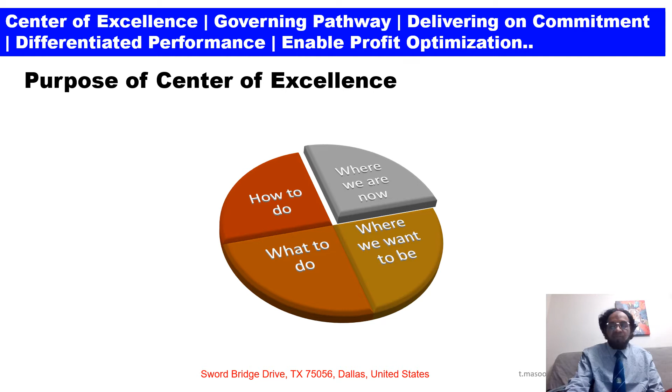Center of Excellence, lecture number 5, HAZOP study guidelines, section number 4. Purpose of Center of Excellence: where we are now, where we want to be, what to do, and how to do it. These are our four concepts in order to deliver the Center of Excellence.

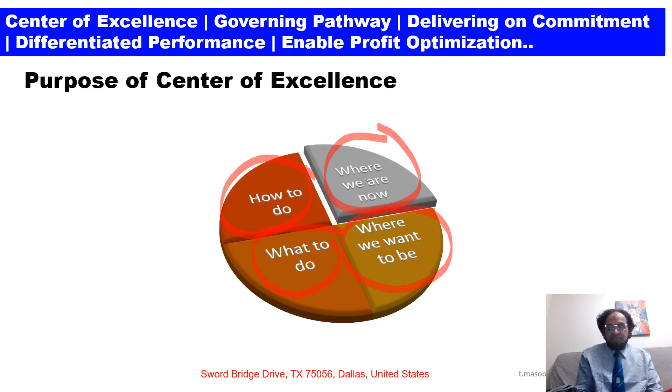These are a narrative, sequential, to deliver as far as the Center of Excellence is concerned. Center of Excellence: governing pathway, delivering on commitment, differentiated performance, enabling profit optimization. This is a Center of Excellence framework. We have already discussed HAZOP, a brief summary about QRA, quantitative risk assessments, risk assessment management system, and SIL assessment.

Today we will give a brief about 5 segments, then we will discuss in detail at a later stage. First, we will give a brief about the leadership best practices. Engineering production best practices are leadership methods and simple in concept.

We will discuss in my lectures on leadership best practices, matrix organizations, about balanced leadership, layered leadership differentiates focus but keeps line of sight. Production asset business widens view to see the whole picture, business planning tool and budget process. We will discuss these in leadership best practices or engineering production leadership.

Lecture number 2 on Center of Excellence, at a later stage, segment number 2: competency assurance. In competency assurance we will discuss what competency is, key elements of staff competency enhancement, how to maintain personal and operational integrity, and we will also discuss ensuring a personal competency development and sustainment plan.

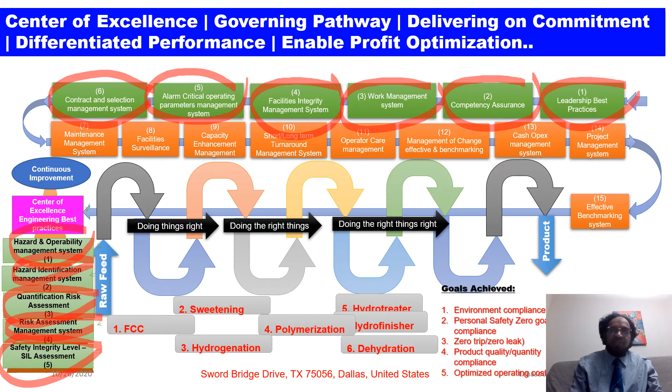Center of Excellence for continuous improvement. We will start from bottom to top here. First segment: personal safety, contractor, co-workers, and community safety must be reliable.

Okay, these are my leading factors. My semi-leading environment compliance, process and asset safety: work safely or not at all. Number 3, my semi-lagging factors: there's always a time to do right things in the right way. And lastly, improvement: if it is worth doing, do it in a better way.

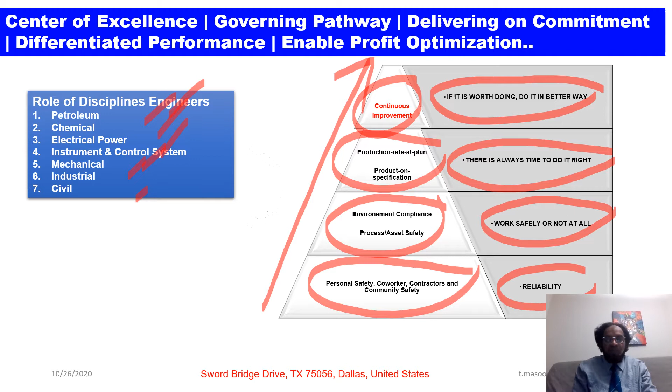So in order to deliver, we need different discipline engineers: petroleum, chemical, electrical, instrument, mechanical, industrial, civil engineer. What is their specialty? Loss prevention engineers, safety engineers, process and operation engineers, optimization, all discipline maintenance engineers, corrosion engineers, integrity engineers, reliability, cost, budgeting, and project engineers. They have to deliver in order to prevent the leakage from leading factors.

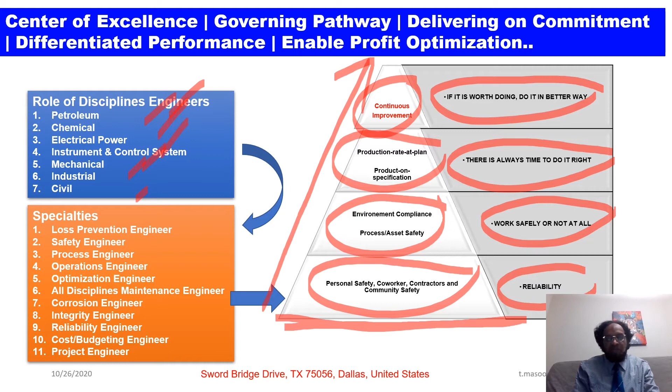So if we plug the leading factors, you are on the right way to deliver or improve this system or system performance as planned or as desired. In order to deliver the result, a center of excellence for engineering best practices is important, vital, and viable.

Key takeaway points: HAZOP study lecture number 4. First, we will discuss the HAZOP process: preparations, briefing and data collection, and phasing the HAZOP study activities.

Forward message, this document has been developed for corporate HSE and quality management system to determine and provide a minimum requirement for the Hazard and Operability study, that is HAZOP. This document is published for oil and gas companies, operation departments, contractors, and consulting utilizations.

The document in its present form reflects, as far as possible, current corporate requirements, taking into account the known available industry best practices and applicable latest national and international codes and standards. This document is subject to periodical review to reaffirm its adequacy or to conform to any changes in the corporate requirements or to include new developments in the subject matter.

This document recognizes that there will be cases where addenda, data sheets, or other clarifications need to be attached to the HSE publication to suit specific application or service environment. As such, the content of the document shall not be changed or re-edited by any user, company, or its contractors, suppliers, etc. Any addenda or clarification entailing major changes shall be brought to the attention of the custodian department, or comments and recommendations about this document forwarded to me at t.masood.dr@bath.edu.

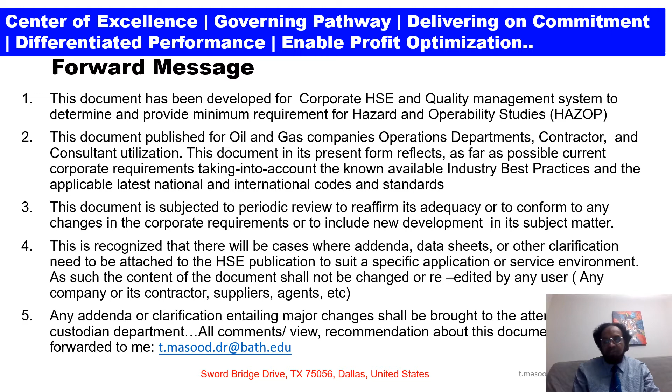Why is HAZOP study needed? First, HAZOP is required for any changes to the process. Hazard and operability studies are a form of hazard identification. The study identifies possible deviations. The contractor shall conduct HAZOP study in compliance with the requirements in the selected company operational guidelines.

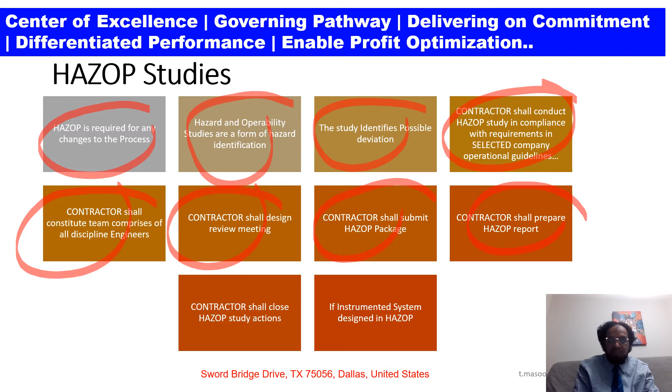The contractor shall constitute a team comprising all discipline engineers. The contractor shall design a review meeting. The contractor shall submit the HAZOP package. The contractor shall prepare the HAZOP report. The contractor shall close HAZOP study action points; if instrumented system designed in HAZOP, it can also be discussed.

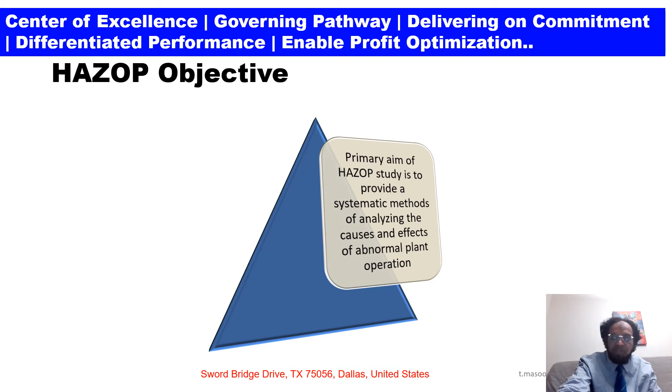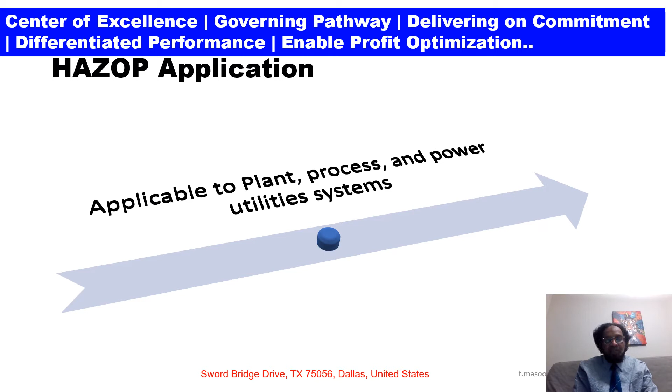So the HAZOP objective: the primary aim of the HAZOP study is to provide a systematic method of analyzing the causes and effects of abnormal operation. Scope: to specify the structure, responsibility, and techniques of the hazard and operability study. HAZOP study is applicable to plant, process, and power utility systems.

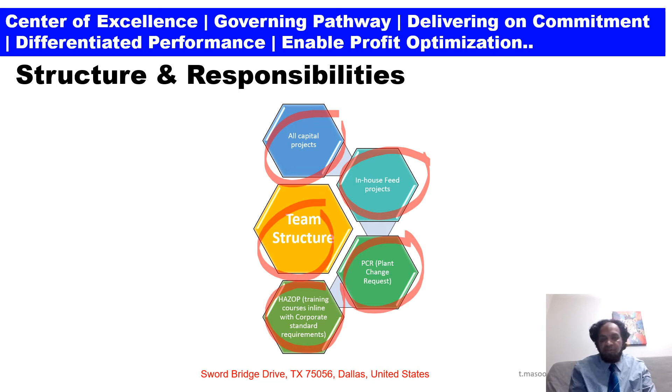Structure and responsibility: team structure first. So for all capital projects, in-house or Feed projects, PCR (a plant change request), HAZOP is a training course in line with corporate standard requirements.

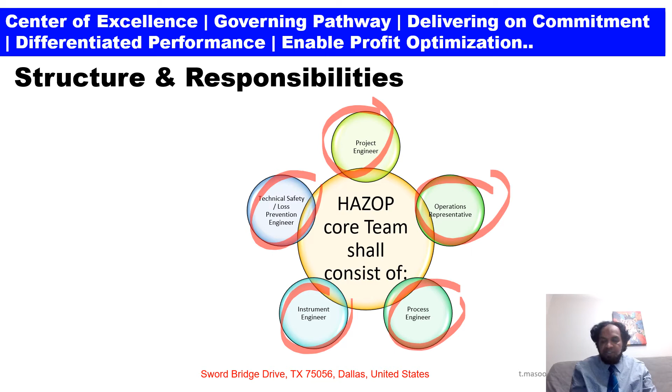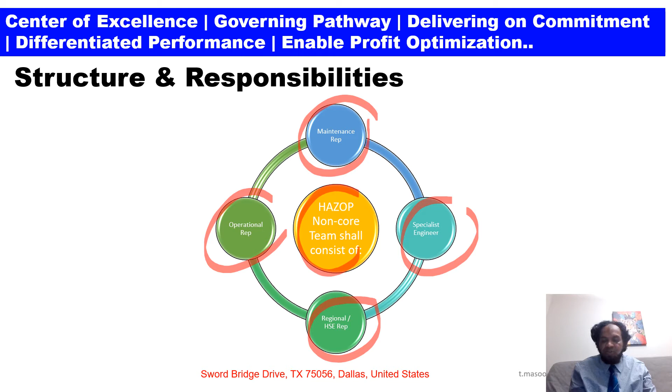Then the HAZOP core team shall consist of a project engineer, operation representative, process engineer, instrument engineer, and technical safety and loss prevention engineer - that's the core team for the HAZOP study. The HAZOP non-core team shall consist of maintenance representatives, specialist engineers, and regional HSE or operational representatives. The specialist can be a process specialist, optimization specialist, or reliability specialist engineer.

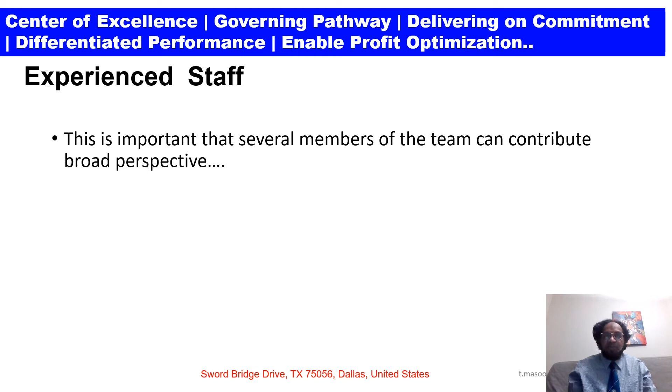Experienced staff is important - several members of the team can contribute broad experience from other similar developments in terms of technology applied and locations. Inevitably, the levels of experience and knowledge required for the HAZOP team should consist of senior personnel from the project, operations, and elsewhere in the organization.

So for the HAZOP team, the quality of the study is highly result from the contributions - adopt positive attitude, provide expertise, be logical and focused. The quality of the study is highly derived from the contribution of the team members and from the global expertise. In order to achieve quality results, members of the team should adhere to the following.

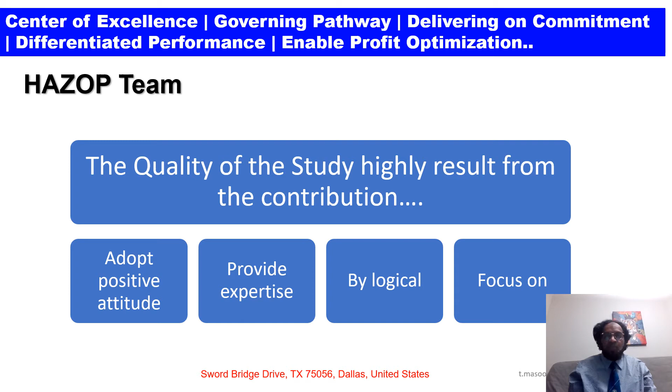One, adopt a positive attitude toward other team members' contributions. Second, provide their expertise on project specifics and from similar experience elsewhere. Be logical, open-minded, and creative. Focus on the objective of the HAZOP study.

HAZOP chairpersons - what do they have to do? All HAZOP chairpersons shall have undertaken and completed a certified HAZOP chairman's course, preferably IChemE UK or AIChE, the American Institute of Chemical Engineers. Number two, the HAZOP chairperson shall have a degree in engineering or equivalent with extensive oil and gas industry experience, emphasizing technical safety engineering, etc.

Number three, the HAZOP chairperson shall have conducted at least 10 HAZOP studies after completion of the HAZOP team leadership certification course, across a broad range of the oil and gas industry, with no less than 10 years of experience in multidisciplinary projects.

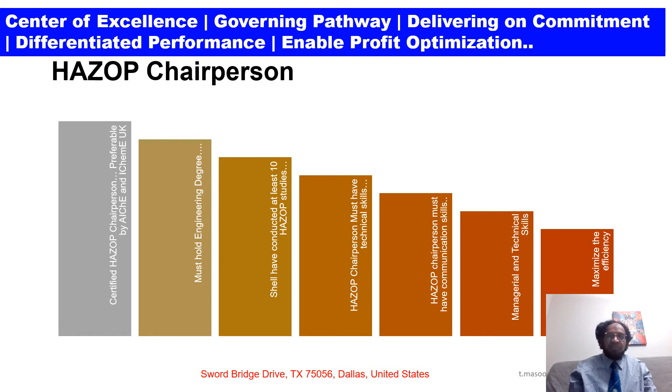Number four, HAZOP chairperson shall have excellent communication skills in English, report writing, and presentation skills. And lastly, the HAZOP chairperson shall have a high level of technical and managerial skill.

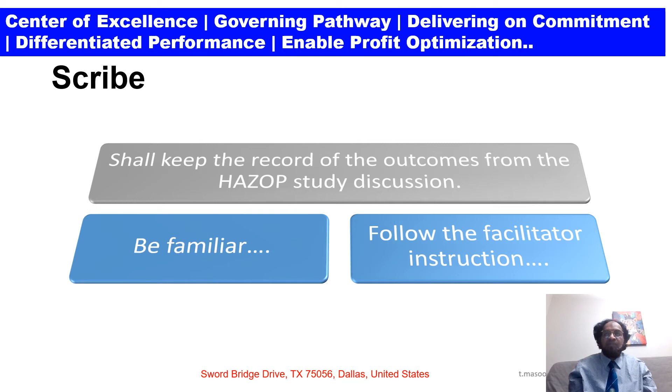The scribe shall keep the record of the outcomes from the HAZOP study discussions, be familiar with the computer software used to record the study findings before the start of the study, and follow the facilitator's instructions in recording and keeping team findings and recommendations.

HAZOP study shall be conducted during FEED, that is front end engineering design. If there are any design changes during EPC stage, then HAZOP shall be conducted, issuing HAZOP P&IDs and key documents. After these project design documents have undergone a design review, the detailed design stage HAZOP and its recommendations shall be incorporated before freezing the design phase, and the Approved For Design (AFD) document is issued.

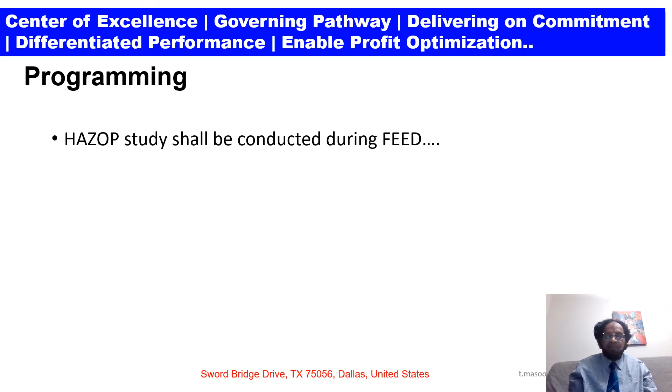Now from the next stage we are going to discuss the HAZOP process. The HAZOP process first involves briefing, then data collation, data presentation, phasing the activities, and scheduling the meetings.

A significant amount of preparatory work is required of both the HAZOP team and the discipline engineer concerned prior to each session. This typically comprises briefing of team members, collecting the relevant data, converting the data into a suitable form, planning the sequence of the study, and arranging the necessary meetings.

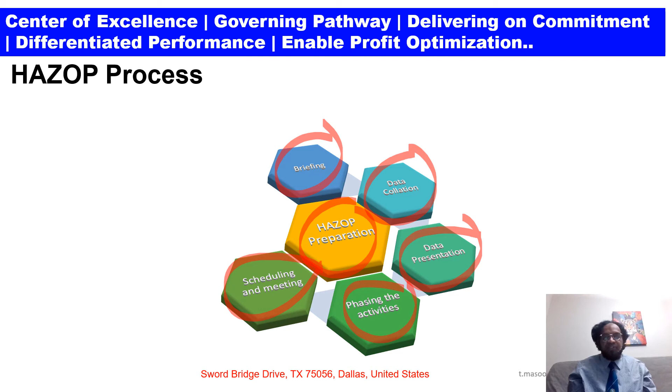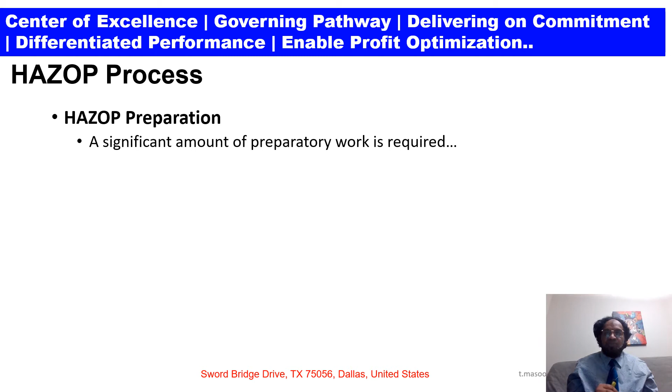So what should HAZOP preparation do? I'll repeat what is important for HAZOP preparation: first, briefing of team members; number two, collecting the relevant data; number three, converting the data into a suitable form; number four, planning the sequence of the study; and number five, arranging the necessary meetings.

Next is the HAZOP process briefing. It's important that the members of the team are familiar with the HAZOP technique. If some team members are not trained or familiar, they may be given a brief on the requirements of HAZOP team members by the HAZOP chairman.

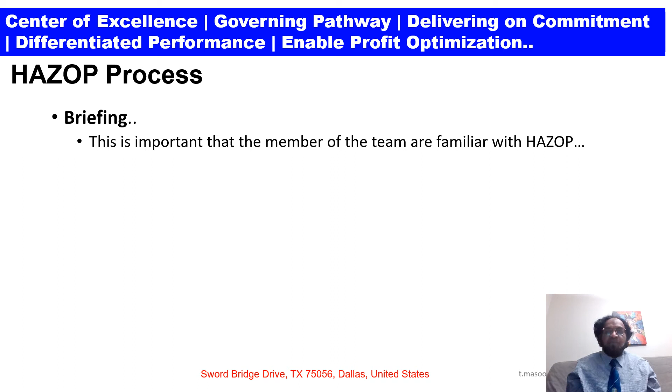Next, data collation. Project engineers require documents, consulted documents, and the HAZOP package. First, the project engineer from engineering, the contractor, or the relevant oil and gas company on the project, whether in-house or outsourced, will be responsible for assembling the relevant data to meet the HAZOP study requirement. The individual discipline lead engineer will be responsible for supplying data to the project engineer where necessary, and advising the project engineer on available data and other related issues.

Number two, required documents. They should collect and compile PFDs, P&IDs of the process and utilities plants, material specification and selection charts, cause and effect diagrams, process design basis, and process operation and control philosophy. Consulted documents by the HAZOP team depend on single line diagrams, equipment specification and data sheets, vendor data and drawings, fire and gas detection drawings, hazardous area classification drawings, etc.

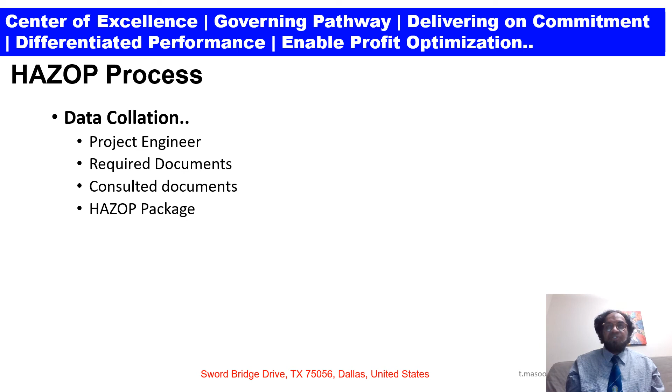Lastly, the HAZOP package. The HAZOP package documents, as discussed in earlier slides, should be issued within 10 working days in advance to allow all participants to review and prepare for the HAZOP study.

Data presentation for the HAZOP process: to save time during the study meetings, some documents used during the review may be marked up with additional information, for example P&IDs annotated with normal and design conditions, instrument set points, etc. Any marking shall be done by the relevant discipline engineer, either on his own behalf or at the request of the independent chairperson.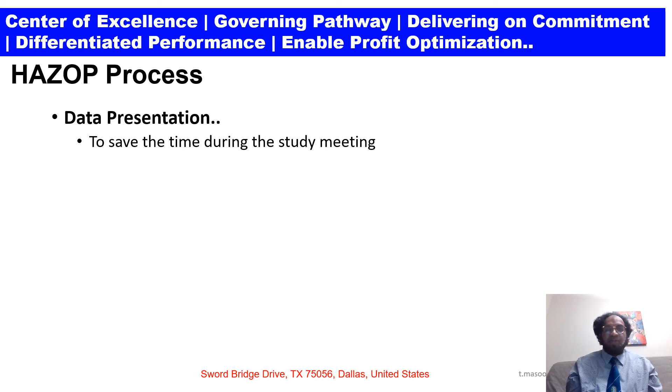So, phasing the activities. The independent chairperson will plan the sequence of the study and define the nodes on each P&ID which can be examined in a logical fashion, so that the results of earlier studies contribute to the subsequent studies.

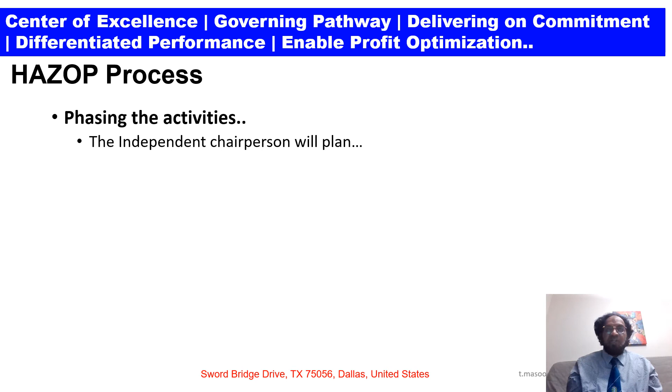Then, scheduling and meetings. First, the project engineer will be responsible for arranging the study sessions and any other relevant meetings, booking of venue, and alerting personnel to their attendance requirements. The project engineer will also arrange for the necessary visual aids, whiteboards, flip charts, and computer facilities to be available.

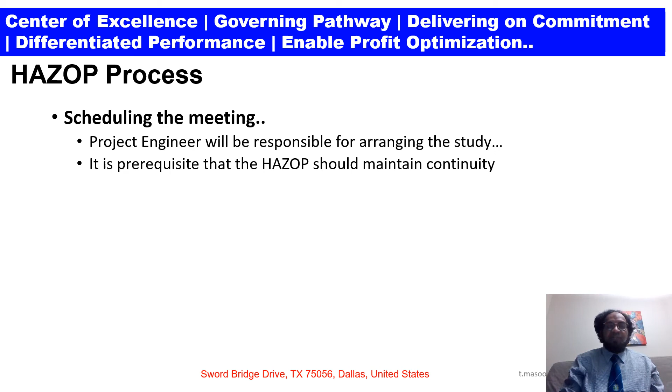HAZOP related or supporting documents include the HSE governance framework, the major accident hazard management framework philosophy, HSE risk management, guidelines for registering hazards and effects, and safety in capital projects guidelines for hazard identification studies.

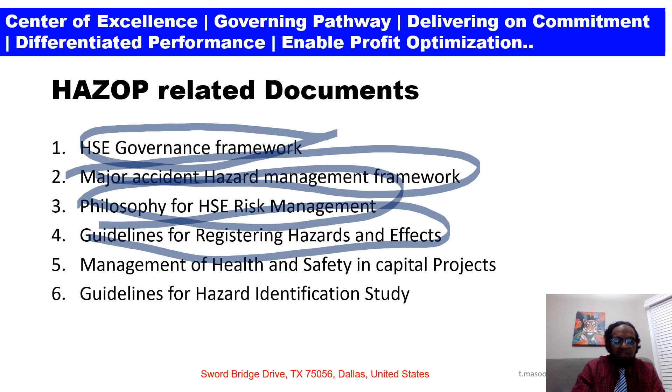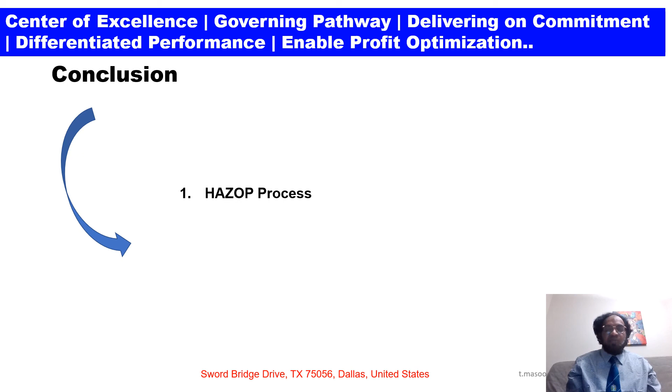In conclusion, today we discussed the HAZOP process, HAZOP preparation, briefing, data collection, data presentation, phasing the activities, and scheduling the meetings. From the next slide, we will discuss further the HAZOP study session.

References: Qatar Petroleum, Doha, Qatar; Oil and Gas Development Corporation Limited, Pakistan; World Energy Outlook 2013; US Geological Survey; US Department of Energy; Schlumberger Oil Field Glossary; International Energy Agency; Wikipedia; Oklahoma State Oil Facts; Norsok Standard; The History of Oil in Pennsylvania; Air Liquide Gas Encyclopedia; Natural Gas from Wellhead to Burner.